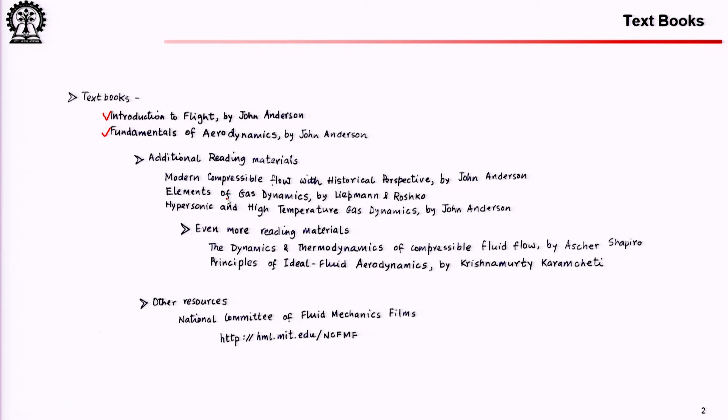In the previous classes, we covered the textbooks required for this course. I would recommend you go through them. I said that primarily there were two books you should go through from end to end, and the remaining books are good to have so you can glance through them as and when you need. I also put up a picture of the deck of these textbooks so you can have a visual appreciation of the kind of books I am recommending.

I also told you about this very important series of video demonstrations of some fundamental fluid mechanical behaviors. If you are really intending to pursue a long-term career in fluid mechanics, aerodynamics, high-speed flows, etc., it is absolutely necessary that you go through this.

If you see here, there is a series of topics on which the stalwarts from the era, like the 60s, 70s, and early 80s, showed experiments of fundamental concepts like what is viscosity, demonstrated what is an Eulerian frame, what is a Lagrangian frame, and the details of boundary layer theory.

When you read a textbook and try to interpret things from the text and images, it is not always easy to understand because fluid behavior is complex. But when you see it visually, a lot of things you may not be able to appreciate by reading a book or looking at an image, you will actually appreciate when you watch these videos.

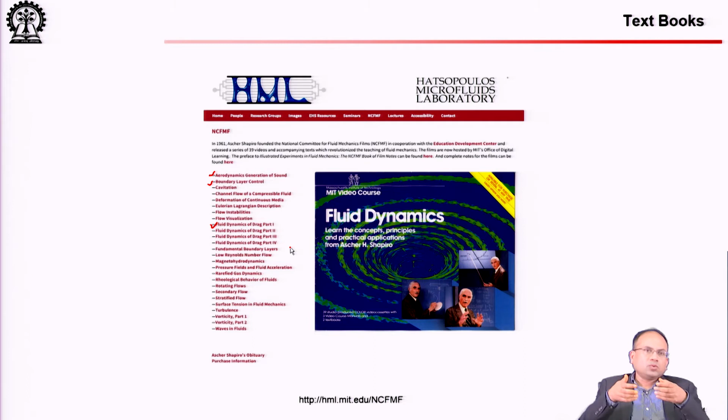I have a feeling that if you understand drag completely—and it is not always easy, because it's a natural process, a lot of things are modeled, so these are the best we understand—but nonetheless, in order to understand drag properly, you will need to understand all the elements of basic fluid mechanics. So I think this topic will give you an opportunity to understand the utility of those core concepts.

So let me now show this. Today, as I said, we will talk about the physics of drag. And here you see I have talked about boundary layer basics, skin friction drag, flow separation drag, etc.

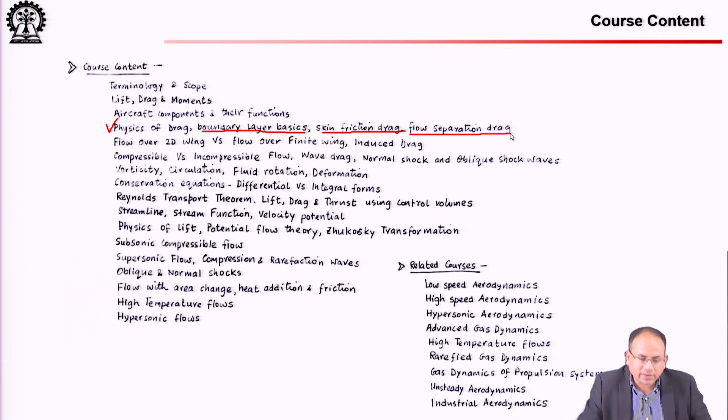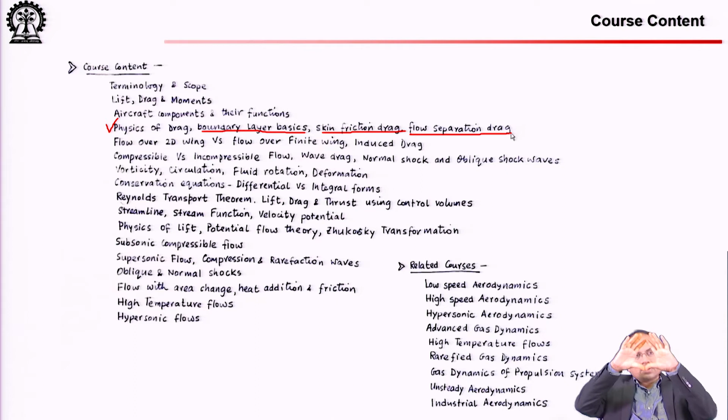We will see that the drag on the aircraft, which is composed of drag on the individual components with some interactions taken into account, can be broken down again. So for a given component, the drag will be a summation of various kinds of drag. So drag on an aircraft equals the summation of drag on its components, with the interactions between them.

Now, if you zoom into one component, say we are zooming onto the finite wing stretching from the root chord to the tip chord away from the axis of the fuselage, and we are interested in finding the drag on these wings, we will see that there are various sources of drag acting on the wing, and that will be the structure of these next few lectures.

So we will try to figure out what are the sources of drag on a given aircraft component, and we will focus primarily on the wing. And you will see there are good reasons for that. If you understand the drag on the wing, then it is not very difficult to extrapolate it into drag on the fuselage, horizontal stabilizer, vertical stabilizer, engine external mounts, nacelles, etc.

So if you understand drag on this one primary component—because the wing is a primary component—you will see that a big chunk of drag actually comes from lift. This is a little bit of a surprise to many, that lift is a force directed perpendicular to drag. If you remember, we have shown this image.

So if you see, lift is directed in this direction, whereas drag is directed in this direction. Lift, I said, is a force resolved normal to the relative wind. So this is the relative wind direction, and drag is the force.

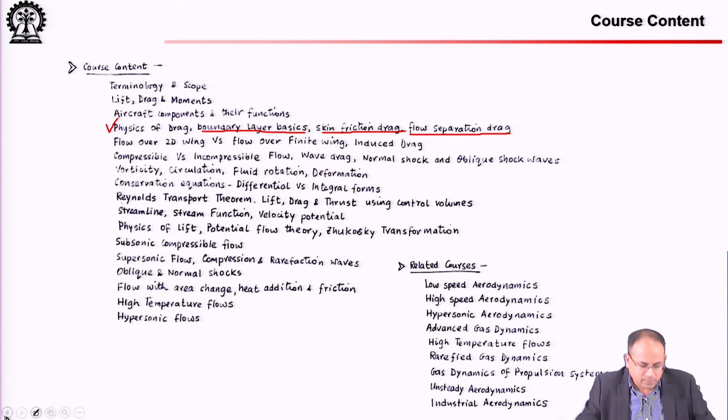So you see that if this is your relative wind—just a second—since this is your relative wind direction, as the air flows over this vehicle, it creates some reaction force.

So, as air is moving over the wings of the vehicle, it creates a resultant force, and we will get into the details of it very soon. Now, this resultant force R can be resolved along the direction of the relative wind. If you resolve this resultant force R along the relative wind direction, you get the drag. On the other hand, if you take the component of this resultant force normal to the relative wind direction, you get the lift. So this is your lift and this is your drag.

You will see that this drag is composed of, so drag on the wing, as I said, if you understand drag on the wing, it is not difficult to find drag on other components. So drag on the wing is composed of, we will see something called skin friction drag.

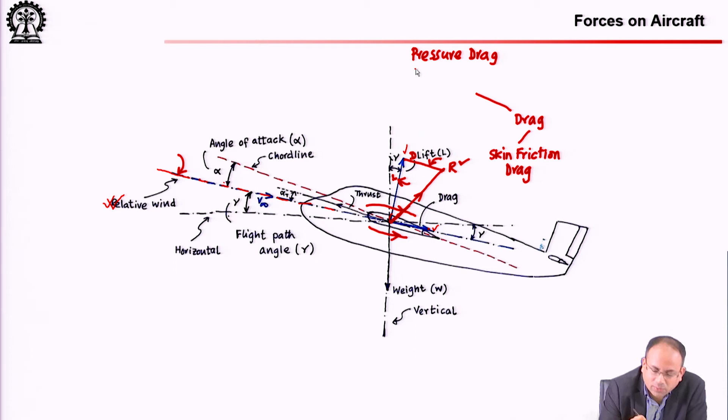So drag is composed of skin friction drag due to viscous effects in the neighborhood of the wing. So drag on the wing, let's just, okay, this should be applicable everywhere. So let's keep it drag for the time being, but we are discussing drag on the wing, or rather we will discuss drag on the wing. So drag is composed of skin friction drag, which is really due to viscous phenomena, pressure drag due to flow separation. Now, this is interesting.

What is flow separation? First of all, what is pressure drag, and then what is that qualifier due to flow separation? In fact, in supersonic flow fields, pressure drag can arise without flow separation. If you resolve the net force arising from the pressure distribution along the relative wind direction, you might find some drag as well. Here also you will find some drag, but it will be negligible. So when there is no flow separation, the contribution to drag due to pressure distribution will be very small. Okay, we will see that.

In fact, in inviscid incompressible flow fields, there is no drag, and that was the famous D'Alembert's paradox. That is, how can you have a flow field? You put an object in a flow field, and some mathematical analysis of the 17th century, 18th century, these mathematicians and theoreticians were seeing that if you model fluid flow like an incompressible inviscid flow, then there is no drag on the body, on the 2D cylinder or whatever you have immersed in the fluid. However, practicing engineers saw that of course when you put something in a flow of water or something, you have tremendous drag. So this discussion we will have at some point.

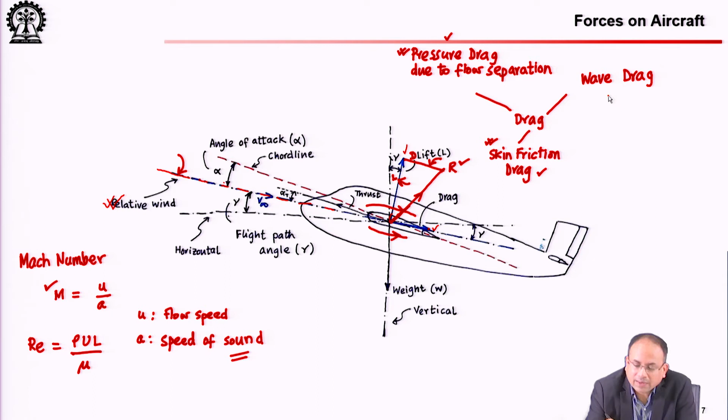So your wave drag is something that shows up when the vehicle speed is such that you start to have shock waves on some portions of the wing, for example. When you have the shock waves, it can be that flow regime of a subsonic aircraft where it has crossed its critical Mach number, entering something called the drag divergence Mach number.

So now you know what is a Mach number, and what is critical Mach number. Critical Mach number is the free stream Mach number at which, because flow has accelerated or decelerated here and there, in regions where flow is accelerating, you can have a velocity larger than the free stream velocity, and thus a local Mach number larger than the free stream Mach number. So at some point this local Mach number can reach 1 even when your vehicle is flying at a subsonic Mach number less than 1.

Typically, it has been seen that when your vehicle is flying at something around Mach 0.8, some portions of your wing might actually be having Mach numbers of 1.1, 1.2, even more. So it is not always that supersonic flight or shock wave considerations come into play only for supersonic free stream velocities; you can also have subsonic free stream velocity close enough to Mach number 1 where the flow has accelerated.

We will see where flow accelerates and why flow accelerates. You will see that on the top surface of the aircraft, flow speed on average is a lot more than the flow speed on the bottom surface. There are many popular theories explaining this which are incorrect. We will see some of the more physically sound explanations of why there's higher speed on the top and lower speed on the bottom.

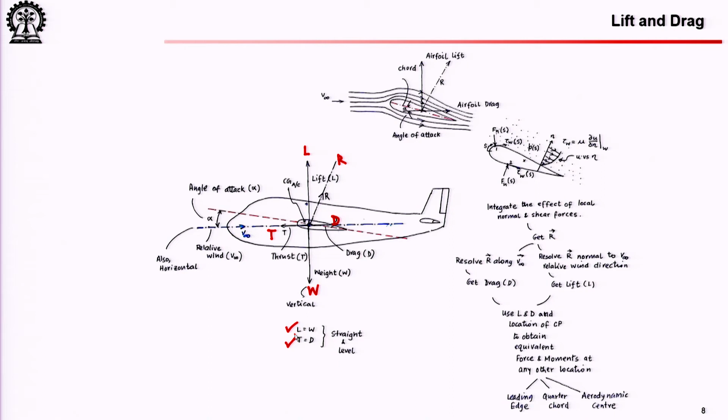So when aircraft are cruising at altitude, this is what it is, and there are no moments—the aircraft is trimmed. Of course there are moments, but they cancel each other out, so if you take an axis into the plane of the paper through the center of gravity, the pitching moments are 0.

If you take an axis from... essentially, if you take various axes through the center of gravity, you can think of a right hand coordinate system, and you are trying to measure the moments.

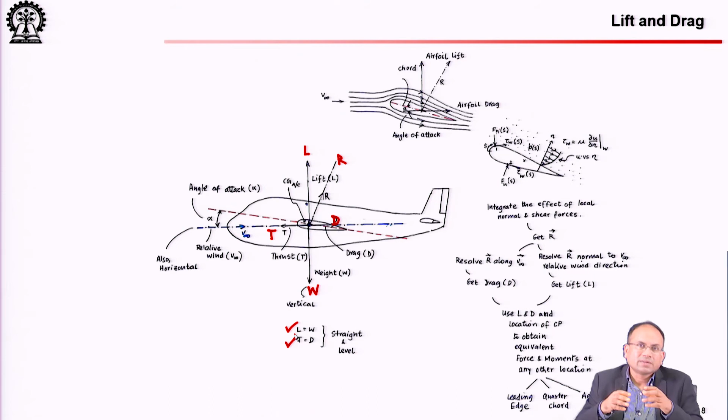Of course, there are forces all over the aircraft. So there are moments being generated because of these distributed forces, but they are all cancelling each other out in this special situation, which is straight and level flight. In fact, the moments on the aircraft are applied when some attitude change, some bank, and all these things are required.

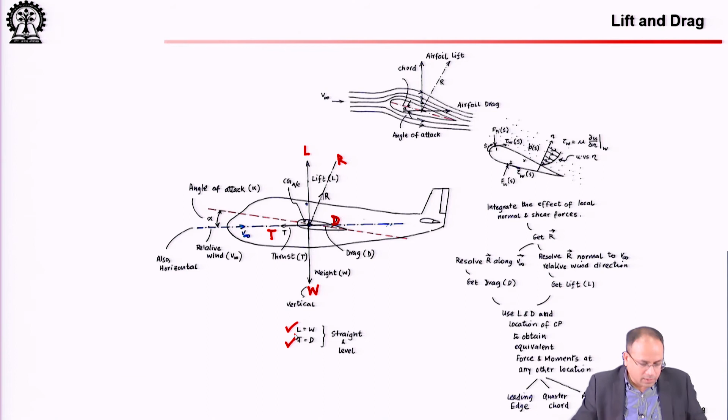Now that you have the big picture of the vehicle forces acting on it, we will look at the wing, because when you try to understand the drag or the nature of this drag force, you can focus on one of these components, and the wing is one of the most crucial components because it is the main component responsible for generating almost 80 to 90% of the lift of the vehicle. So we will look at drag in the context of the wing, and you can figure out drag on other components once you understand the basics of how to calculate drag.

So here you see we have an airfoil cross section. What is an airfoil cross section? Essentially, if you think of a fuselage, you have a wing going from the root to the tip. What you do is take a cross section of the wing at some distance from the root chord or the fuselage axis, and that gives you a shape which looks something like this, known as the airfoil shape that the wing is using at that location.

Now some wings might have the same airfoil cross section at every location. Some wings may use different airfoils at different locations. These airfoils might be twisted with respect to one another — we talked a little bit about geometric twist and aerodynamic twist. But right now we are focusing on one particular cross section of the wing.

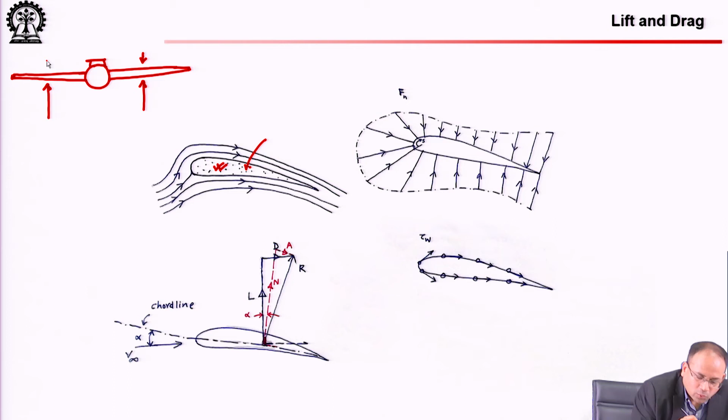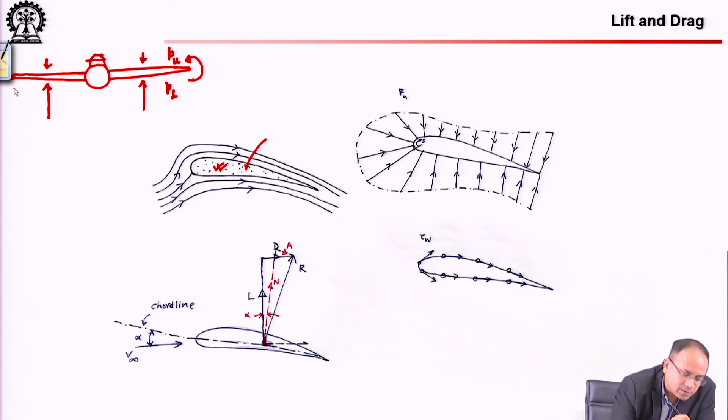Now when you have a finite wing with high pressure on the lower side and low pressure on the upper side, you have flow that leaks across the tips from the lower to the upper side. If I draw it here, suppose this is the fuselage from the front, and this is one wing — on average the force on the lower side is much higher than the force on the upper side, though from location to location things might vary. That is really what provides the net force keeping the aircraft afloat against gravity. Force being higher really means the pressure on the lower surface is higher than the pressure on the upper surface, because force is pressure multiplied by surface area, giving you the local force normal to that surface. So if the force from the lower side is bigger than the force from the upper side, it essentially means the pressure on the lower side is more than the pressure on the upper side. When this situation arises, flow will leak from the lower surface to the upper surface like that.

This movement of flow from the lower to upper surface will create something known as the trailing vortices, and these trailing vortices will induce some flow field around the wing and all over the aircraft, because of which you will have that extra component of drag that we call induced drag.

Induced drag is a phenomenon that happens on finite wings, because finite wings have high pressure on the lower side and low pressure on the upper side. When I say this, understand I'm thinking of straight and level flight. In a maneuver, or if an aircraft is even flying upside down, you have to understand things in that context.

In straight and level flight, pressure on the lower side is more than pressure on the upper side, and around the tips, since there is no more barrier, flow can move from the lower to the upper side, and that creates this vortex motion that trails from the wing to very large distances.

Those vortices shed from the wing tips create this extra kind of drag, known as the lift induced drag, and you will see that this is a very important component of drag in real applications, because real applications will always have finite wings, and finite wings have a termination.

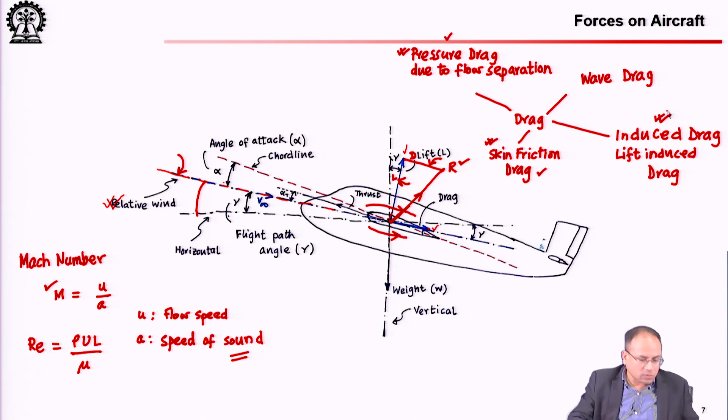So all these discussions stem from the fact about the slice of the wing we are looking at. You can take a slice on a finite wing and that will show you a flow field, or you can take a slice from an infinite wing. The interesting thing about the infinite wing is, whatever you see in one slice will be exactly the same as whatever you see in another slice, in terms of airfoil shape, geometry, size, etc., and the flow field around that airfoil. For an infinite wing, wherever you take a cut, you will see the exact same thing - if I give you 10 different cuts, you will not be able to say which cut is from which location.

Okay, that is the infinite wing concept. And if you want to compare that to a finite wing, if I take cuts from different portions, first of all you might be able to identify just by the geometry if the wing is twisted geometrically or aerodynamically, or if the size of the chord is changing.

You can just, without any flow field, say that it is a finite wing. On the other hand, suppose you have the exact same cross section, but the flow field will change from location to location on a finite wing in flight. Of course, if it is standing on the ground with no flow around the wing, you may not be able to say which section is from where if all the sections are similar. But in flight, because of the trailing vortices at the tip, some distribution is created at various locations on the span that will help you identify that this is from this location on the span, that is from that location, etc.

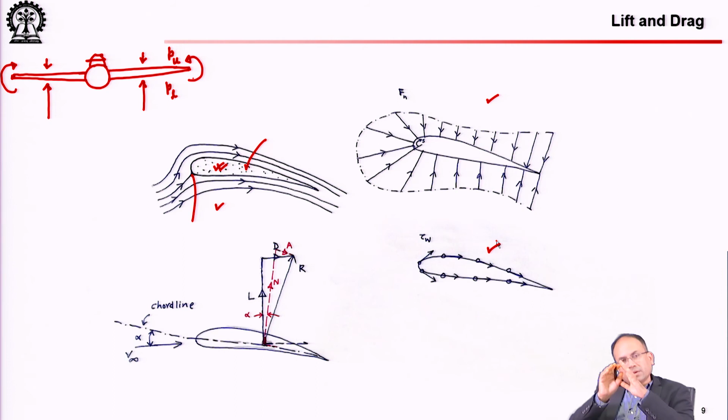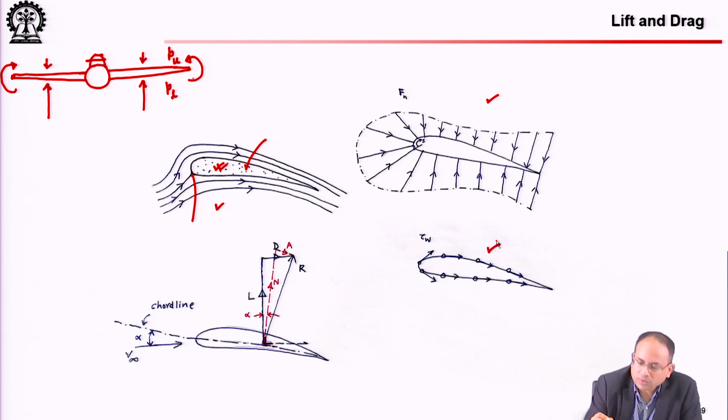So the relative motion of air around the wing will create two primary kinds of forces. One is, we will say, the normal forces, and that arises from the pressure of the air at that location of the wing.

So as the air is flowing, it still has some static pressure because of molecular bombardment, collisions with each other. And when these molecules are also colliding on the wing surface, they are imparting some momentum exchange, and that leads to this normal force. So you see that we have marked it as Fn, the normal force due to the flow of air over this wing.

Secondly, we have this thing called the tangential force, also known as shear force. Sometimes you will hear the term stress. Instead of shear force, normal force, people will say normal stress or shear stress. Essentially, stress is force per area, so if you divide the force by the area on which it is acting, you will get stress.

So here, as air is flowing past the wing, the wing is seeing the static pressure of air around it, and when you multiply the static pressure by the area on which it is acting, you get the local normal forces. So find the static pressure on those discs, multiply it by the disc area, and you will get the normal force on that disc. And of course, you get a distribution such as this.

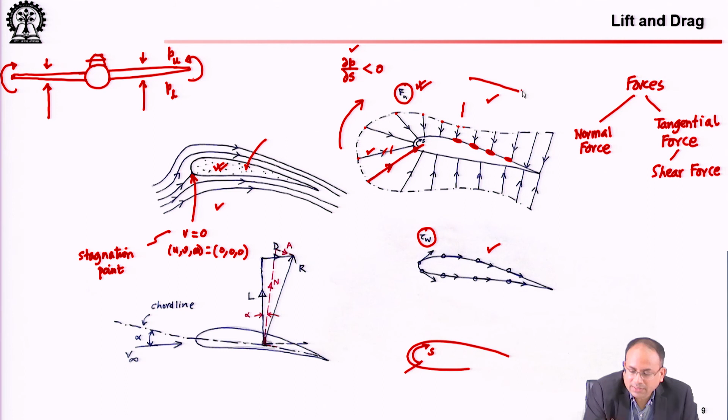In this region, you see that the pressure again is increasing. So this region, from here all the way like this, dP/ds is positive, and it is called unfavorable pressure gradient, and you will see why it is called that. But the point of the matter at this point is there is a pressure distribution.

So when flow goes around a wing, pressure is not the same at every point. There is a distribution of pressure, and on the average, pressure on the top surface is lower than pressure on the bottom surface. That gives you force on the lower surface greater than force on the upper surface. Hence, the resultant force has a component directed upward, if you're thinking of a normal flight condition.

So that is your normal force. The effect of favorable and unfavorable pressure gradient will become evident when we talk about pressure drag due to flow separation. At this point, this is just something to know: when flow goes over a body, sometimes it sees favorable pressure gradient, sometimes unfavorable pressure gradient. This even happens in internal flow fields, say flow inside a wind tunnel, flow through an engine cross section, flow through the diffuser of an engine or the nozzle of an engine. Flow can see increasing pressure as it's moving, flow can see decreasing pressure as it's moving, and there are very important implications of what happens when flow sees either of these two situations.

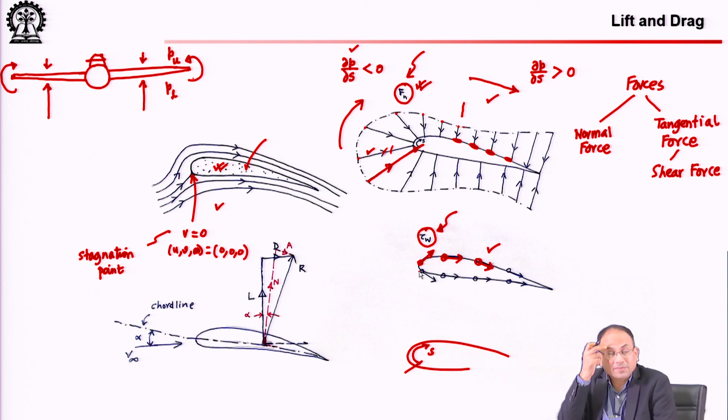So when you add all these forces and take a component in the direction of your relative wind, you can see that these things will have a significant contribution in the direction of the relative wind, because these forces are almost aligned with the relative wind direction, due to being tangential to the wing and the wing being aligned mostly with the wind direction. Of course, the angle of attack is there, I'm not saying these will exactly align with the relative wind direction, but it's almost aligned. So shear forces arising from viscosity will contribute to drag, and that drag is known as skin friction drag. So the drag due to these forces really becomes the skin friction drag.

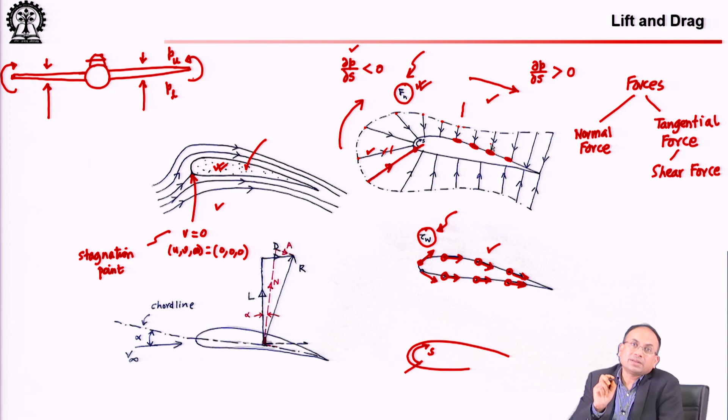Now, the pressure drag, do not think that just taking the component of these forces in the drag direction is the pressure drag. To some extent that is the case, but the real contribution of pressure drag shows up when there is flow separation, and we will see that this unfavorable pressure gradient has something to do with that flow separation. So we will look at pressure distribution around the wing when that dP/ds positive has created flow separation, and then we will see that the pressure distribution with flow separation creates a significant contribution to the drag force.

So, if you have the flow around the airfoil, you have a resultant force arising from the distribution of the normal force and the shear force, and then you can resolve it as lift and drag. By now you know that lift is normal to the relative wind. In this case, my relative wind is like this, hence my lift is normal to the relative wind.

There is also a way in which you can resolve these forces along the normal to the chord. So you see this n is the component of r normal to the chord, and a is along the chord. It is really dependent on what you are trying to achieve. In most cases we would be concerned with lift and drag, so we resolve r into forces normal to V infinity and parallel to V infinity, but in some cases you might need to resolve it normal to the chord and along the chord. Of course, there is a connection between them because the angle between these two lines is the same as the angle of attack.

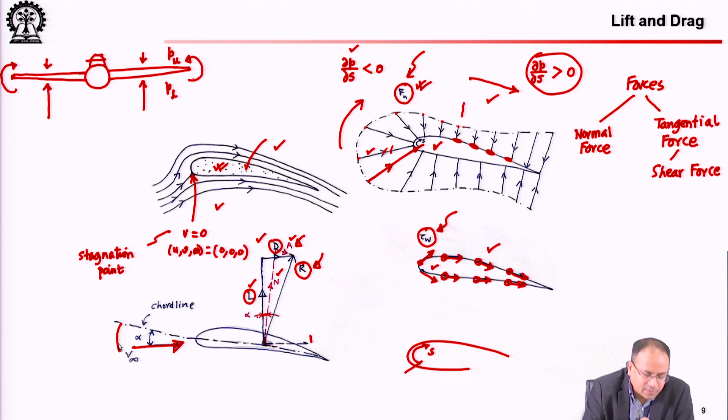Now, the flow field around an airfoil is quite complex, and it has a lot of interesting phenomena happening. Although you are seeing perhaps a distribution of pressure like this in the steady state, to reach that distribution of pressure, you have a lot of things going on which are of fundamental importance in aerodynamics.

We will continue with this portion in the next lecture, but at this point I want to bring to your attention that if you think of an inviscid flow field where you have put an airfoil and you switch on an airflow, you will see that the flow would look something like this. This is a very strange thing you will see: in most cases, unless you align the flow in such a way that you have this phenomena at the trailing edge, in all other cases you will see that there is this way in which the flow is leaving the airfoil cross section.

What is happening here is you see that this flow line has to undergo this very sharp bend along the trailing edge, and this is something that nature is not fond of, or there is some problem in terms of the viscous stresses, the acceleration of the fluid that it has to undergo while negotiating that curve of zero radius of curvature. So some of those issues arise.

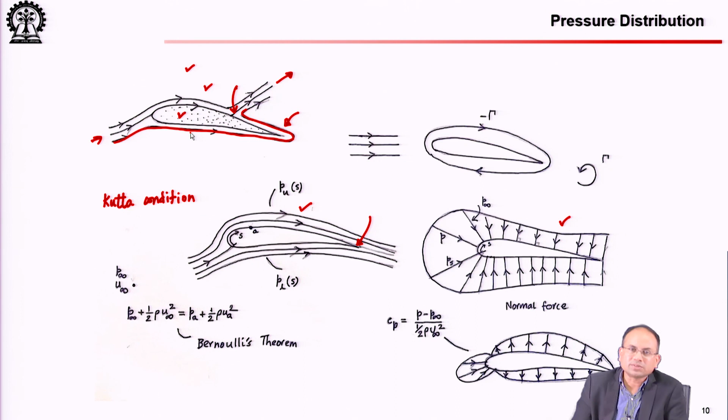So, as I said, if you have an inviscid flow, or rather a flow that has no viscosity - see, inviscid and viscid flow fields are not the same as a flow of a fluid which does not have viscosity, so we will talk about these things. If a fluid has no viscosity, we call it an ideal fluid. Viscosity is something that creates that friction effect. As the flow goes over the object, it creates a tugging effect, trying to pull the object in its direction of motion. But an ideal fluid, which does not exist, will have zero viscosity, hence it will not tug along the surface at all.

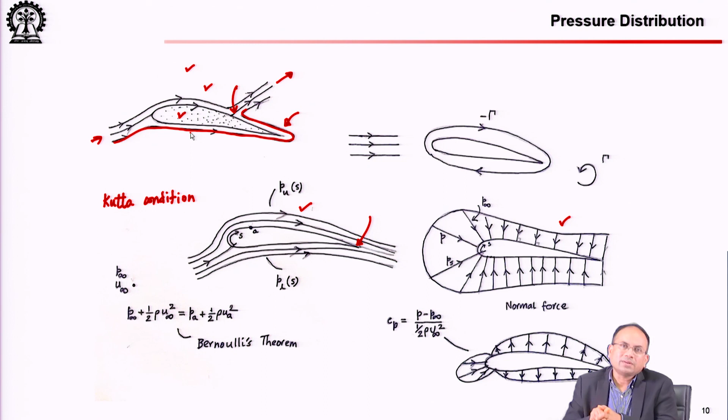Real fluids with viscosity can exhibit inviscid behavior, as if there is no viscosity, under certain conditions. It is not that they do not have viscosity, they do have viscosity, but for viscous effects to manifest, you need something more than just viscosity - you need velocity gradients. So if in a certain flow region you do not have velocity gradients, or if your inertia force term... I should not talk about this ahead of time, but you will see that there are other situations also where a flow can behave in an inviscid manner even though it has viscosity.